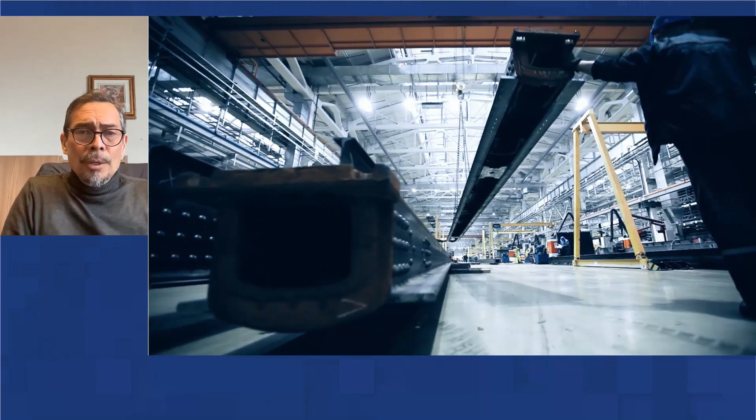Now I'm putting up some images you can see, with insight that we gathered last year. We developed this small video to show our customers and our allies that the demand for the electrification of society is much higher than whatever today's production is of electrical steel, and also of stamped rotors and stators for electrical machines.

What I mean is that today there is not enough capability on the planet to supply the amount of electrical machines demanded by our society.

We are working very closely with steel mills, trying to orient and define what are the best business cases, how to invest, and how to create this capability. We are also working very closely with customers, the OEMs that are producing these electric motors.

Not only in the car sector, also industrial sector and house appliances. But today we're going to focus on the electrical vehicle.

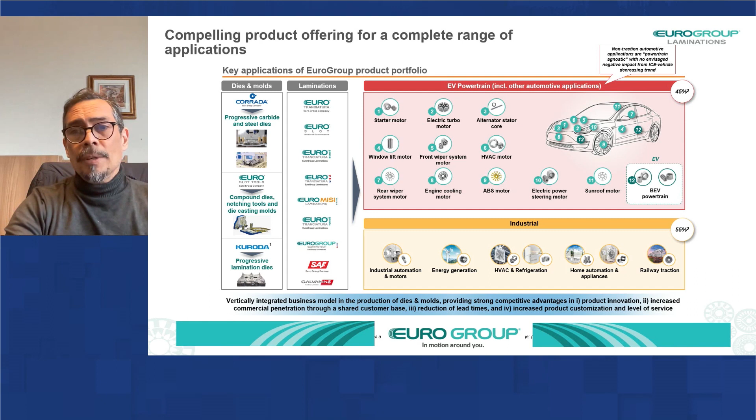We are placed everywhere. We started the electrical vehicle venture especially in Mexico because of a special company in California that I'm not allowed to mention by contract, but for whom we build all their motors globally. So this global footprint is very important for American, European, and some Asian customers today that we have.

We supply more than 60% of the traction motors in North America, more than 50% of traction motors in Europe. In Asia, things are much more complicated. We have a Chinese facility, but you know that the market over there is especially structured in such a way that we are positioning ourselves slowly, but in a positive manner, rapidly I would say. That is going to grow rapidly from now on.

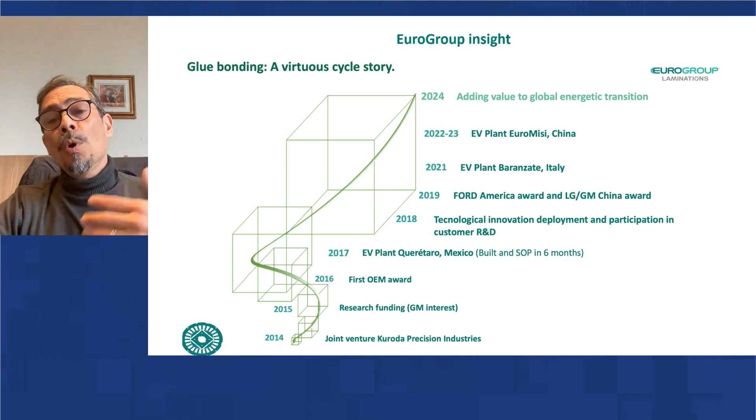In 2016, we launched the first products for this American company I mentioned before, and then in 2019, we started working with most of our customers, Ford, General Motors, Volkswagen, all our major customers we have today. Today we're continuing opening new applications in the EV sector with new customers and tier ones who work with some other OEMs.

So I would like to focus now on the most technical side and leave the commercial side behind. So we have published short communications in 2020 and 2022 that I would like to share with you.

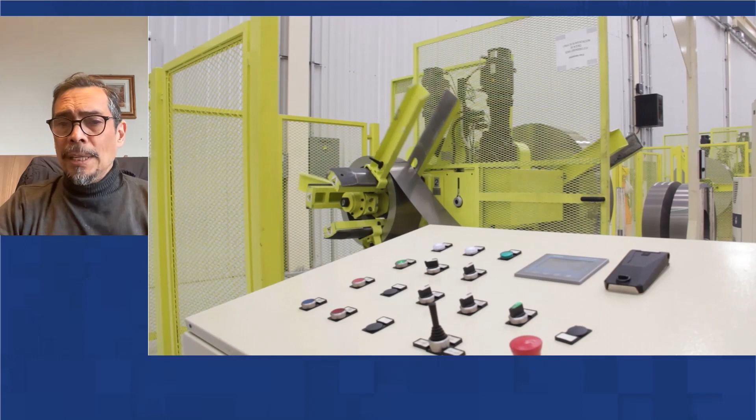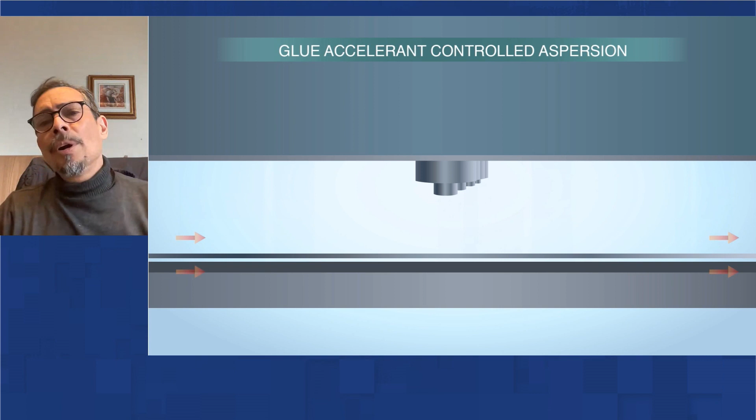So I'm going to show another video here where you see a very different plant that has to be very clean, because now we're speaking about glue bonding inside of the press. In the same stage where you cut the laminations to produce the stator and the rotor, we are capable of glue bonding those laminations together by adding an accelerant on top of the lamination that will come into contact later with some glue dots that we will apply below the lamination.

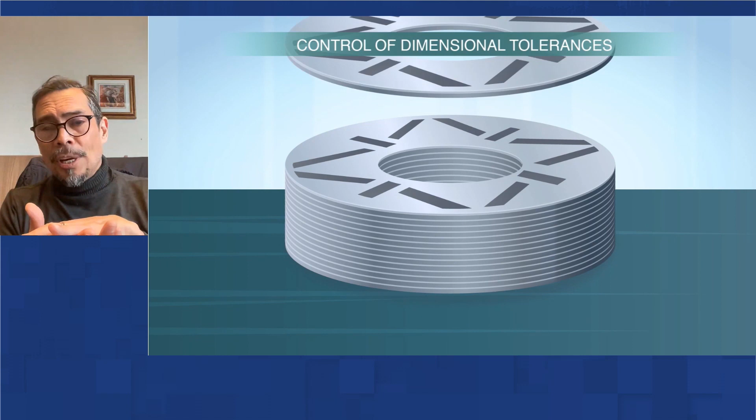So now the lamination has glue dots strategically placed where you want to have adhesive strength, and they come into contact in the last cutting stage, and then because it is an anaerobic process, the curing will start.

That is a very fast curing. As I said, below 2 minutes, you reach sufficient adhesive strength for the part to be taken by a robot and sent into the inspection line and packaging station.

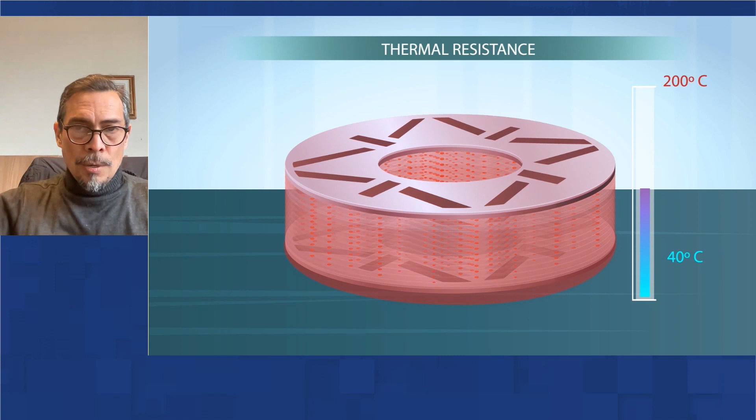We've studied this product with our customers, OEMs and tier ones, and we have demonstrated these benefits that you see, and that I'm going to show a little bit further in the following slides.

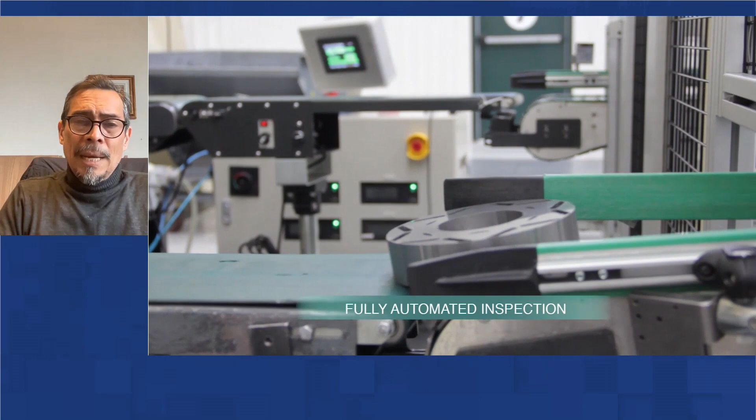But this product is obviously the most efficient magnetically and mechanically. You can see the products coming out. These are real products. After 2 minutes in the press, they're ready to be shipped. The robots are going to take them and send them into inspection.

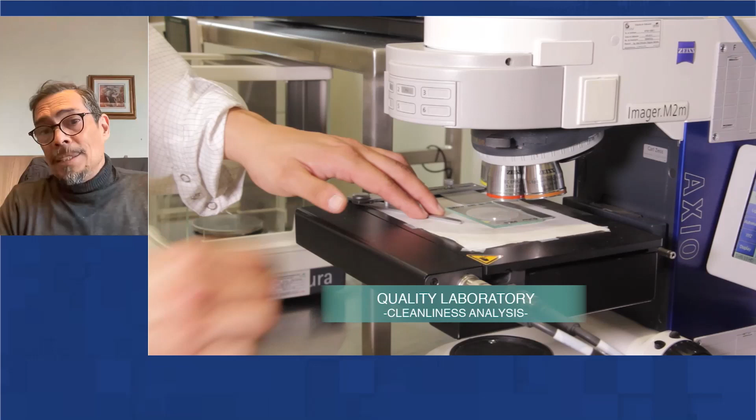We also have laboratories that are going to perform a batch quality inspection that is required by our customers. All the information is gathered into the cloud. So our facility is Industry 4.0, and our customers can follow our production even through cameras, and they can look at their production in line.

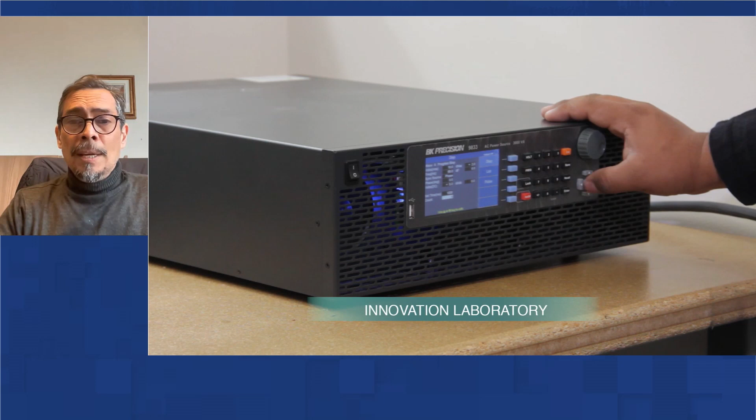We have laboratories that we have set up in Mexico and in Italy with these special test benches that we have developed that are capable of measuring some very tiny differences that sometimes are not sensed by commercial test benches, although we also use commercial test benches in addition to these.

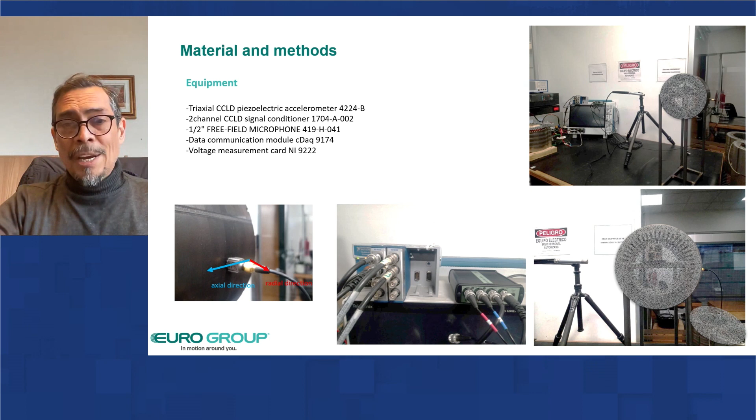These are the test benches that we have set up, complementary to the electromagnetic test benches we have, that can measure noise, both in a free setup or measure noise directly within the electromagnetic experiment.

And you can see from those publications, in red, the conventional fastening methods, and in blue on the right side, how glue bonding benefits by decreasing the amount of losses.

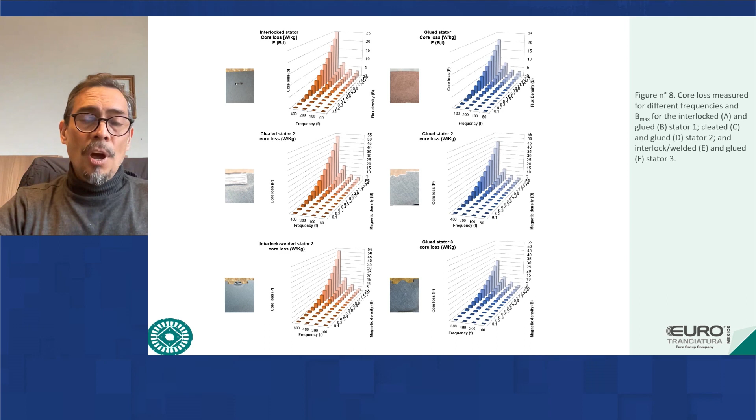These losses come basically from the damage made by these conventional methods on the special alloys that are produced by our steel mills. And this is very important to understand, because the steel mills invest a great amount of carbon footprint in producing a very sophisticated alloy.

Our message is: try not to damage that special lamination, because we have invested so much carbon footprint in it. So let's avoid breaking it, making holes in it, welding it, let's say, overheating it. As you can see...

The metallographic images show that these materials break like glass, and once they're broken, their magnetic efficiency is very much diminished. So that is the rationale behind it.

But when you continue studying the effect of glue bonding, you can show that the mechanical stiffness under compression, as we replicate the shrink-fitting effect inside the motor housing, is much better with glue bonding. And the energy losses, even under compression, were shown to be much better when using a glue bonded product.

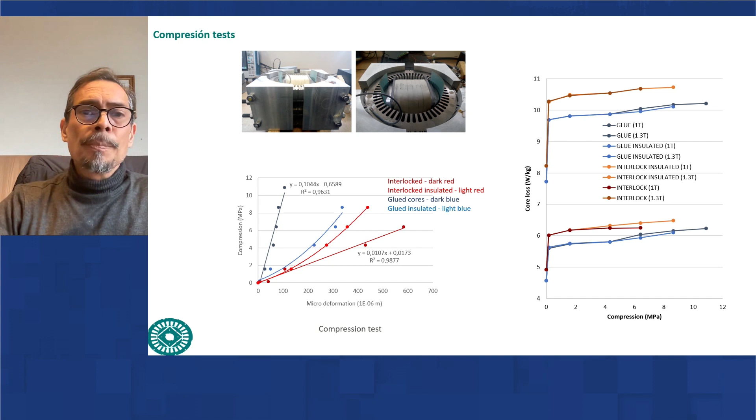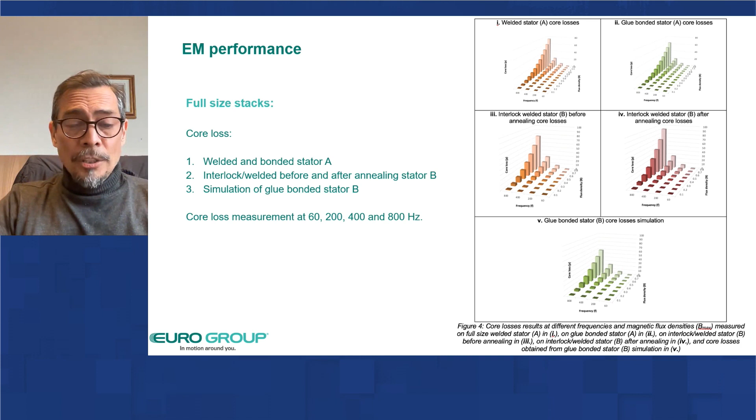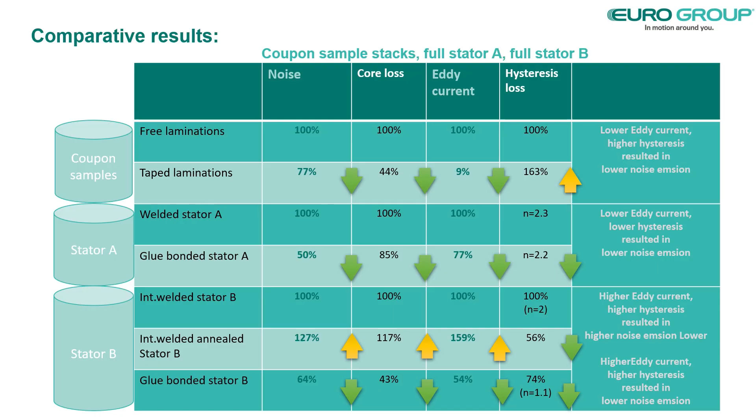We are capable of relating this vibroacoustic behavior with the welding, and also with the annealing that will damage the lamination and the special alloys I mentioned before. So what we're saying in these articles is it is beneficial to go with glue bonding, and we presented a rationale where glue bonding allowed us to reduce eddy currents, which were shown to produce the vibration I mentioned before.

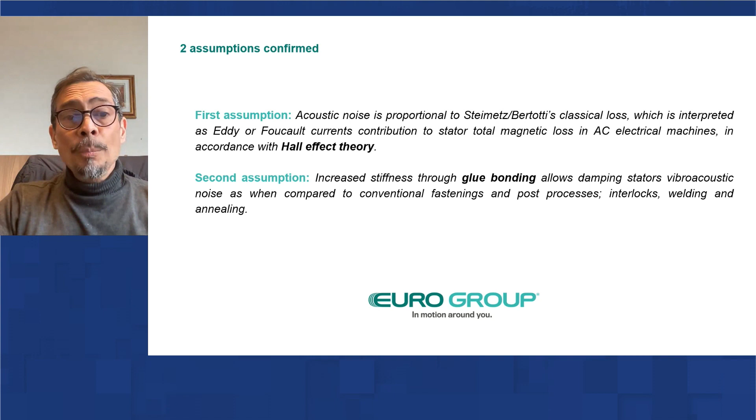But because I see that I only have a couple of minutes remaining, I'm going to jump to the last study that I wanted to show you. This is a study that shows on top the BH curve.

The BH curve is the magnetization curve. So for a given amount of current, you have a magnetic density that is called magnetization, measured in Tesla. On the left side in red, the magnetization curve is very soft, very slow; the slope is small. In green, you have a much bigger slope, and you can see that with less current, you produce a higher magnetization, meaning that with less current, you produce more torque in your car.

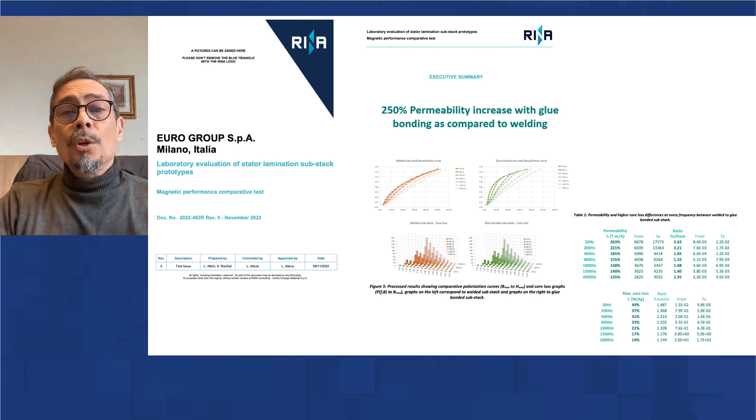And that is very important, because current is heat, current is also vibration, current is management of your battery, and current is management in your inverter. With the University of Padova, we analyzed further, in a driving cycle, the behavior of using less current in your machine, and what it would represent in terms of the losses, in this case on the overall machine, including the battery management and the inverter.

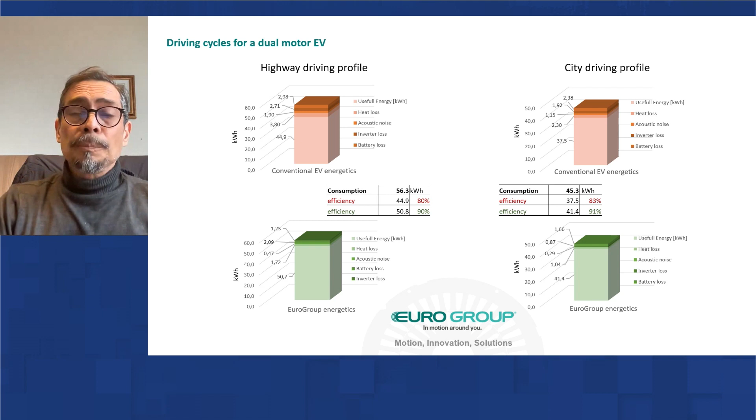And now we're speaking about an improvement of 10% of the energetics of your car. Not only on the motor, I'm speaking about the overall machine, and this is reflected in a range improvement of more than 10%, meaning that for the same battery charge, you're going to drive more than 10% longer with it. And that is very impressive.

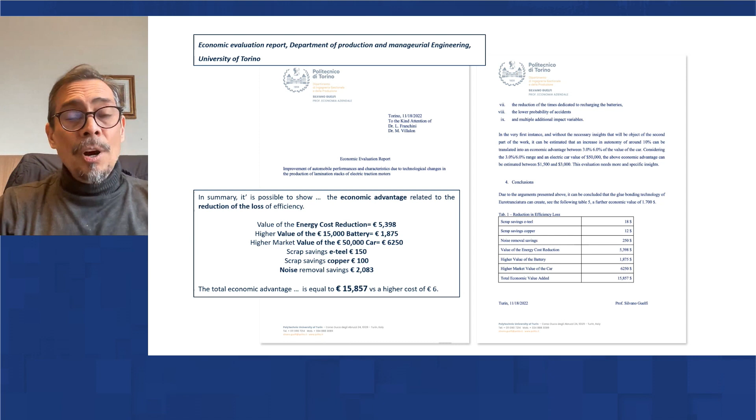This is the report by the University of Padova. The University of Torino helped us to make sense of these numbers, and they show that it represented a value of 15,000 euros in benefits for a longer life of the car, battery and inverter system at the customer level.

So now I have my little chrono here. It looks like I've been speaking for 20 minutes, and that was the deal. Dr. Villani, I will give you the microphone back.

Thank you, Dr. Villalon, for your interesting presentation. We have received 2 questions from the audience. The first one is: what is the typical quantity of electrical steel needed for a permanent magnet synchronous motor magnet? I think it depends on the motor size, but what is your comment?

Well, in my experience with our customers, we are speaking of motors going from 150 to 250 kilowatts, and they weigh from 20 to 30 kilograms. So that's the amount of steel you have in there.

Okay, another question from the audience. Do you think that in the future the stator and rotor core can be realized by 3D manufacturing? I love this question because, as a belief, I have that belief, and I am very excited by this. But I have to confess that my boss is not very happy with my belief, and I agree with you. The future is probably, yes, additive manufacturing. Thank you.

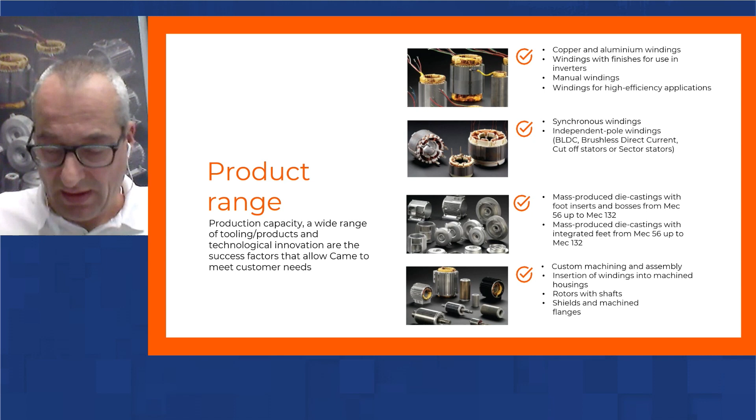A short view of the product range. On top, winded stators - particularly distributed winded stators, which are very common. The second picture is concentrated stators, particularly for brushless motors. Concentrated means coils winding around each tooth. The third picture is a view of the die casting division - we produce parts for electric motors, but not only for electric motors. The picture on the bottom completes the production process: machining of the winded stators with the housing, as well as including the rotor, eventually with the shaft.

As I said, not only aluminum parts for electric motors, but also third-party die casting parts, very different from electric motor parts, such as housings, shields, and flanges. Here you can see a view as an example of some of the most important production of Came, speaking of aluminum die casting.

Not only products - I'm speaking briefly about services too. Myself, as R&D manager, cover different topics such as the design of electrical motors, the testing of electrical motors. One important thing nowadays is the optimization of existing motors - we can see a lot of improvement we can introduce in electric motors, as well as some bench tests of electric motors and partial discharge testing.

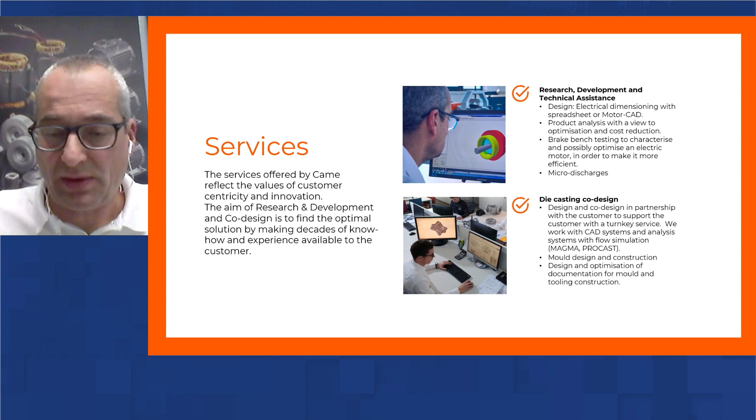Regarding the die casting division, we can follow the customer with the project from the very beginning, and we also have the possibility of making optimization and simulation with Magma, for instance. We follow the project from the very beginning, from the production of the mold and then the wall test.

Just a brief picture of my colleagues.

Before I go into more details, I would like to show you a brief video. I'll ask the organization to start this video, please.

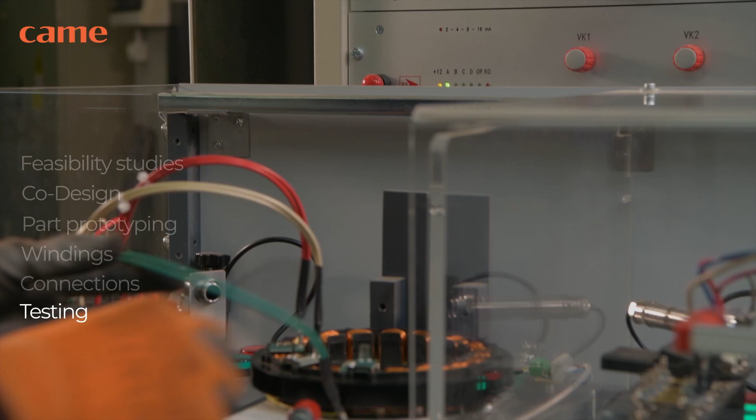There's material cost and material feasibility. Looking at distributed winding, it's for sure a very well-known process - we can find all the needed parts very easily. There are many different suppliers for the same part, for instance Eurotranciatura. On the contrary, for brushless stators, there is so far not yet a commercial part - every product is a customized product. For every product you need a dedicated stamping tool, a dedicated winding tool, and so on.

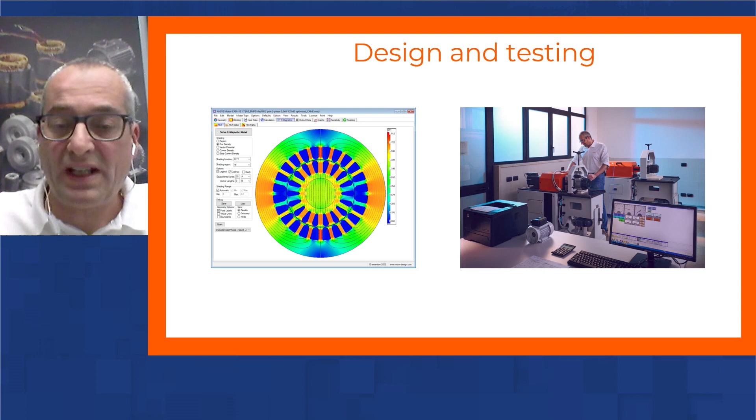Design and testing is also one of the very important key points in these products, meaning that motor CAD designing is nowadays a must. Interesting is that through motor CAD simulation, it is possible to arrive not at one unique defined solution but at different solutions. So we sometimes offer the customer at least two different solutions, stating all the key points as well as the cost level and price at the end. And not only design, but also bench testing to confirm the results of the design.

At the end of the presentation, I would like to spend a few minutes on partial discharges. It is an issue related to inverter duty. Anytime you have an inverter supplying the electrical motor, you will face trouble because of peaks of voltage, which will at least disturb the motor, but in the worst case can really damage the insulation of the winding stator. And the higher the bus voltage, the worse the condition.

We are getting recently some requests from our customers for 800 volt electric motors. And 800 volts means you will face strong troubles regarding partial discharge due to these voltage peaks related to the inverter function itself. They cannot be avoided, but it is possible to work on that and find the best solution in terms of partial discharge to ensure and grant the life of the electrical motor during its function.

Now the final question: if I go back to the picture of these two stators, who is the winner between these two different solutions? I didn't speak about other solutions on the market, like the hairpin or the flat copper wire, only these two because they are property of KAME's processes and knowledge. Who is the winner is not an easy question, and the answer is not easy either. If I look at the most important automotive players, I cannot see so far a unique choice. We see both choices, also different choices, matching with rotor with magnets or reluctance rotors and so on. So a unique solution hasn't yet been defined.

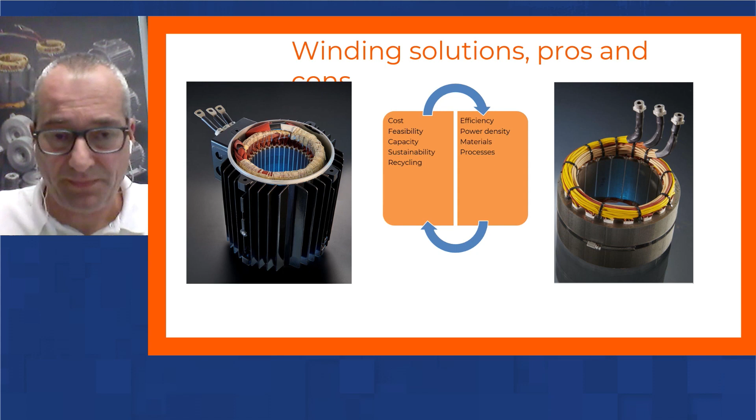How much is the maximum slot fill factor for the distributed winding in your product?

Good question. It depends on the size, because if we go to the smaller stator we produce, the IC50, speaking of dimension we're talking about a 73 outside OD, 38 ID stator, we are around 32-33%, looking at an industrialization feasibility. The filling factor considers the total cross-section of the stator slot and the cross-section of the bare copper wire, not including insulation. So on the smallest one, we're around 32-33%. But if I go to bigger stators, the IC160 and 180, particularly for low voltage stators produced with many parallel copper wires, we go up to 48%, which is extremely high, but grants a very high quality result.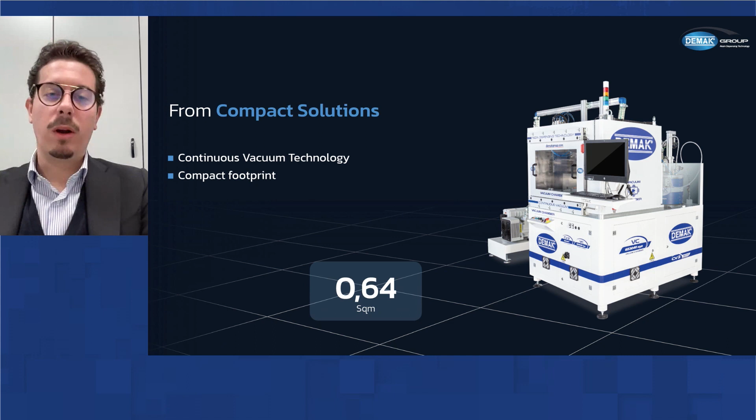A fully automatic line is a solution where Demak takes care, at 360 degrees, of the potting process for stators or rotors. Starting from preheating of the parts—of course preheating also depends on the temperatures involved in the process and the temperature of the resin to be dispensed—after preheating of the stators comes vacuum potting, then resin polymerization through tunnel ovens, arriving at the final stage of cooling down.

This kind of automatic line usually works with only one operator, whose duty is just to load and unload the parts from pallets. In case you want to automate this step too, the machine can work autonomously without any operator.

Also, some words regarding our resin manufacturing facility: here the process of production is fully automatic. The company today is in expansion, so Demak will invest very soon in a new plant in order to increase production capacity, which already today can count on 50 tons per day, working 3 shifts. Thanks to the full automation of our cycle, it's also possible to guarantee complete lot traceability, so we always know from A to Z what happens to each resin and hardener batch.

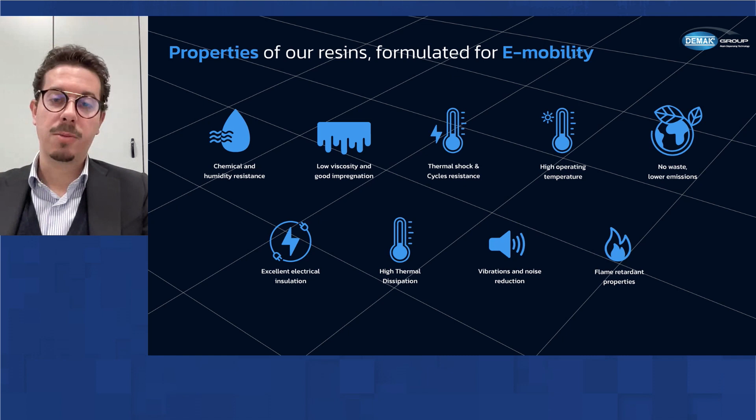Let me say that many of these characteristics always pay attention to our mechanical background, because we perfectly understand how tricky it can be to handle abrasive materials in production, or the impregnation grade through low viscosity. So many of these characteristics also come from our mechanical experience of the dispensing technology.

The company is ISO 9001 certified, and we are also going through the IATF certification that will be operative and certificated from January 2024. This is made to serve better our tier 1 and OEM customers. We cooperate a lot with external laboratories, with University of Torino, Milan, for all the tests we are not able to conduct internally, with others that have the instruments adapted for the scope.

Going a little bit more into the specific topic, Demak is not only a resin system manufacturer, not only a dispensing equipment producer, it can really be a partner, a consultant for electric motor customers and people who would like to perform potting technologies into their models. So we have three kinds of approach with our customers.

One is process consulting, where we go to determine the best potting cycle with all the times for productivity and impregnation of the stator. We can also make chemical consulting, going to select the best resin system according to the parameters our customer is looking for, along our quite broad portfolio of resins.

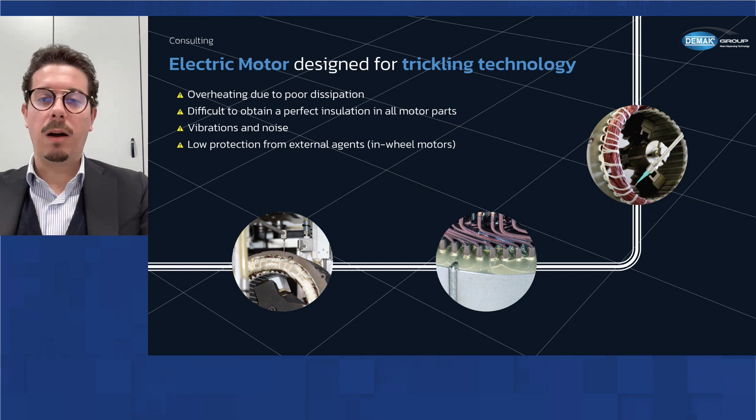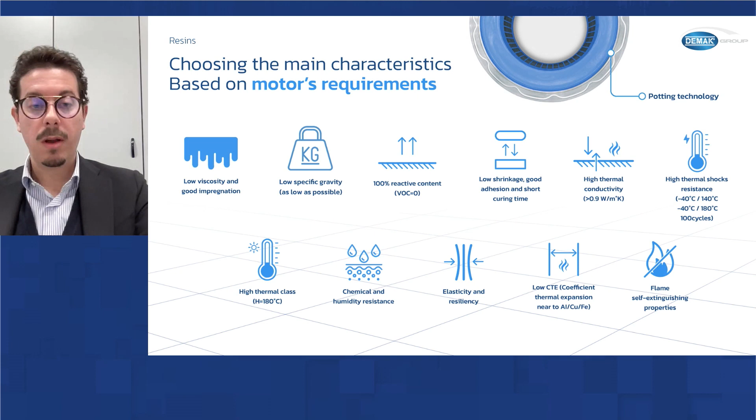And that's why Demak is proposing potting technology. To go deeper into the resin selection, I will leave the floor to my colleague, Dr. Menozzi, who will explain better the characteristics of the resin system we are going to propose and the process related to the selection. Thank you, Dr. Menozzi. Thank you. I am Alberto Menozzi, plant manager of the chemical plant of the group.

Our R&D is very strong in this field, and we have developed several formulations, epoxy and polyurethane, room temperature and heat curing, in order to meet all possible customer requests and possibly also to anticipate some customer requests.

A main characteristic of the system that we look for is the low viscosity and good impregnation. This is very important because it's necessary to fill completely the space, avoiding leaving air inside. Air has practically no heat conductivity, it's 0.03 watt meter Kelvin, so nothing. It's very important to avoid air and to have, by the resin, a very good heat dissipation.

Reducing the space of the motor means increasing the power density, which means increasing the development of heating. So it's important how we can dissipate this heat in the best way.

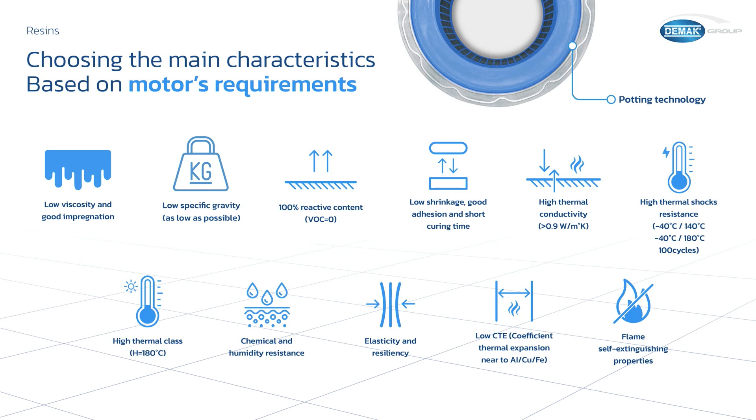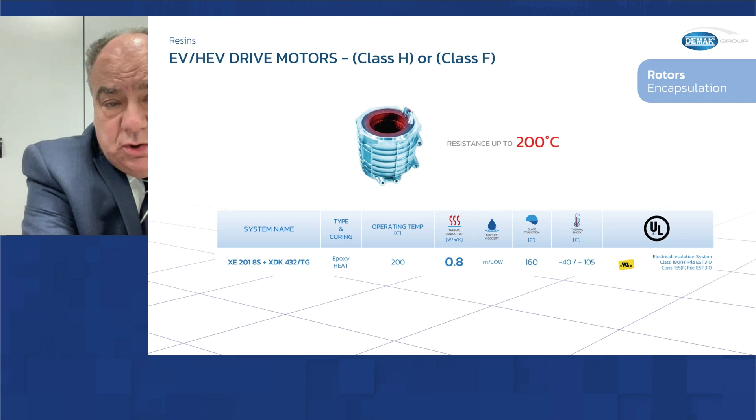In this slide we show one system that is suggested for rotors. In this case, the main important point is the glass transition temperature, which must be very high, because rotors can reach high temperature, and it's necessary to have a resin that mechanically maintains its characteristics also at high temperature. Please note that all these systems are UL certified.

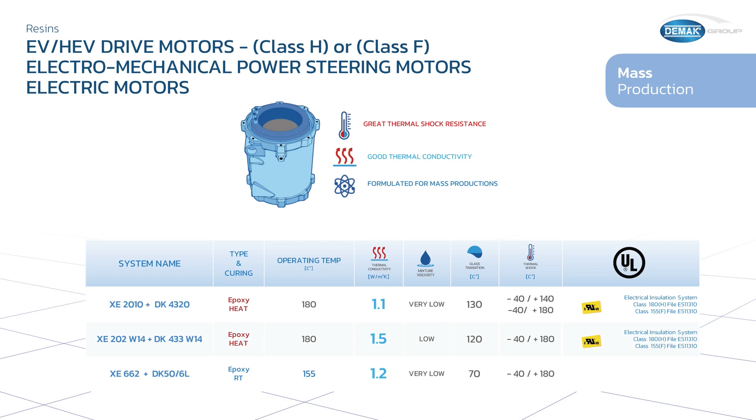These three systems are more used for mass production. Mass production means a lot of motors to produce, so they are easier to work with. Two of them are heat curable, so they need an oven for curing. The third one is a room temperature curing system that, however, shows very high thermal shock resistance and very good 1.2 thermal dissipation. So it's used a lot by customers for mass production.

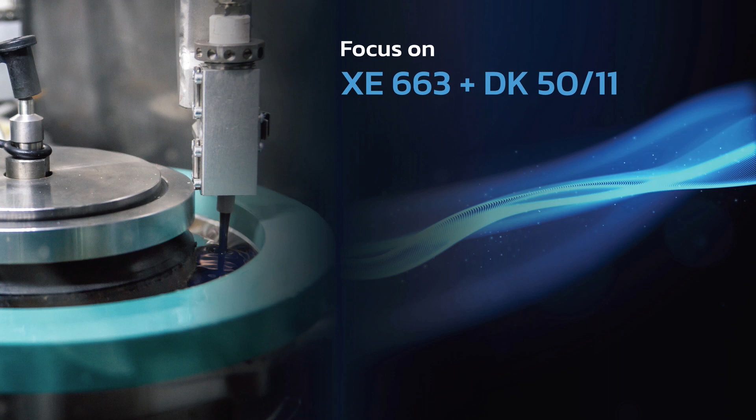As I said, we focus now on a particular system named XE663 and DK50-11. This is a system that shows a lot of good features. First of all, the low viscosity, very important for application and wetting of the motor windings. High thermal dissipation, high operating temperature, very high thermal shock resistance - incredibly how many cycles it resists - resistant to chemicals, for example ATF oil, excellent electrical insulation, and very easy to use without the need of high temperature for curing.

Here you see the weight loss after 5,000 hours at 200 degrees. This is reduced loss of weight, maintaining practically the same starting mechanical and electrical properties.

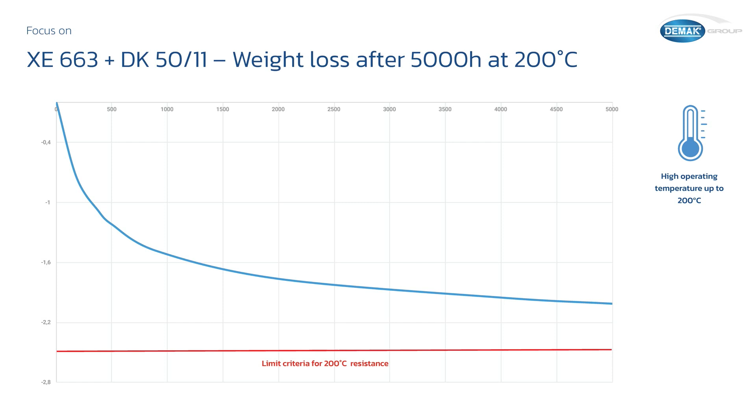The results are incredible. Not only do we arrive at 100 cycles, the minimum that we ask for the system, but we arrive at 1,000 cycles without any crack, and we stop at 1,000 because we need to use our chamber for other tests.

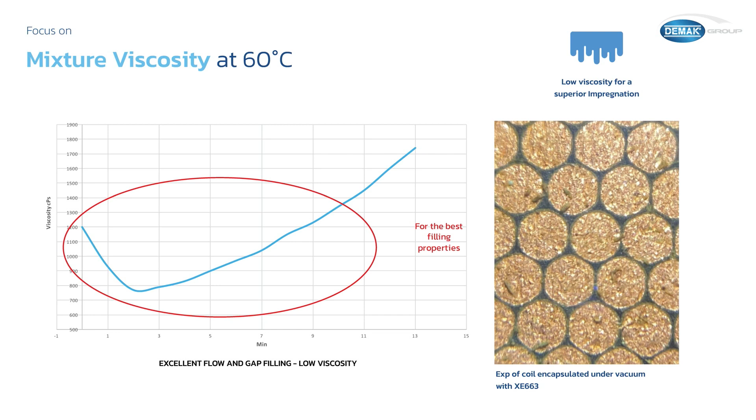Another interesting system, used also for motors, also at room temperature curing, is the XE661 and the K5006. In this case the TG is lower, we speak about 65, 70 degrees. But tests performed on motors show that operating temperature is reduced between 25 to 40% according to the motor dimension. It means a lot more life for the motor in working, in exercise.

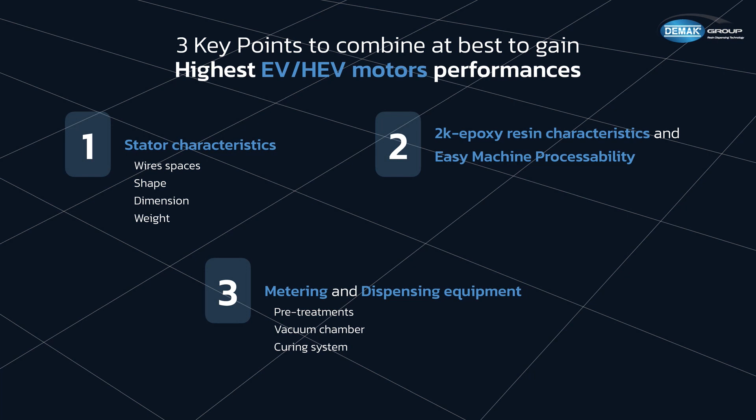Okay, so thank you, Dr. Menozzi, for the precise insight. As you can understand, the main target to achieve a very good impregnation and good heat dissipation cannot only depend on the resin system itself, but is a combination of factors. First of all, the stator characteristic, the spaces available, the shape, the dimension, and the weight that we have to respect. After that, of course, a good selection of the correct epoxy resin system to have good performances that our customer is looking for. But the third, and maybe one of the most important, is also the dispensing solution that has to perform the potting in a certain way in order to achieve the results that are then shown on the technical data sheet.

Thank you, everybody, for your attention.

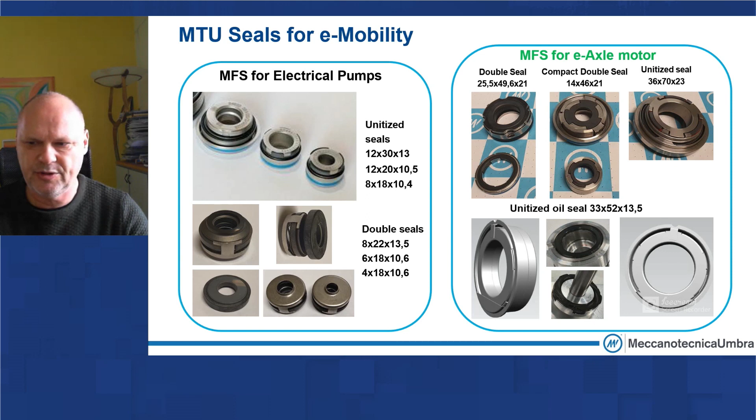In particular, we will focus this presentation on the product for cooling the motor, and the product we are considering is layout B. So after developing 3 different layouts, we saw that the best solution is layout B, for reasons I will explain later.

The cooling of the shaft of the electrical motor is something like this. The mechanical seal has the role of avoiding leakage between the rotary shaft and the cover of the motor. We have seen, through experience with our test bench that we produce internally, that the best solution in this case is to design a mechanical seal with a very small peripheral speed. This means that the shaft of the motor, where the mechanical seal is placed, must be small.

With this solution, we are able to avoid or reduce much the leakage due to the centrifugal effect, because in this case the fluid is inside the mechanical seal. During rotation at a very high speed, the centrifugal force on the fluid between the sliding face of the mechanical seal increases the leakage rate. So to reduce this effect, it is important to design the shaft in the seal chamber as small as possible.

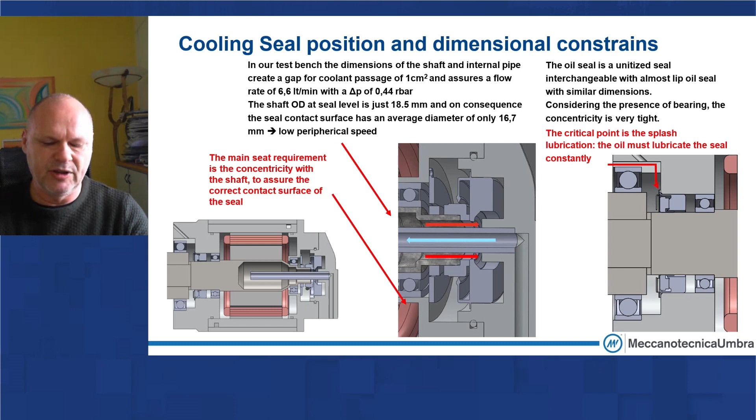About the oil mechanical seal, we have different needs, because we have the oil outside the mechanical face seal. This means that there is no centrifugal effect that increases the leakage. Let me jump to the next one.

So the solution that we developed for cooling the rotor shaft is this kind of layout. As I told you before, we required a very small shaft, but we obtain in this case also a very small axial length.

The main characteristic of this mechanical seal is that we found a system for assembling the seal and avoiding this type of error, the tilting effect. When a rotary part of the mechanical seal is assembled on the shaft, a mistake between the rotation axis of the shaft and the rotation axis of the rotary part could form an angle. This angle produces a tilting effect, and this tilting effect increases the leakage. We developed a solution in this product to avoid that this mistake during assembling affects the leakage rate.

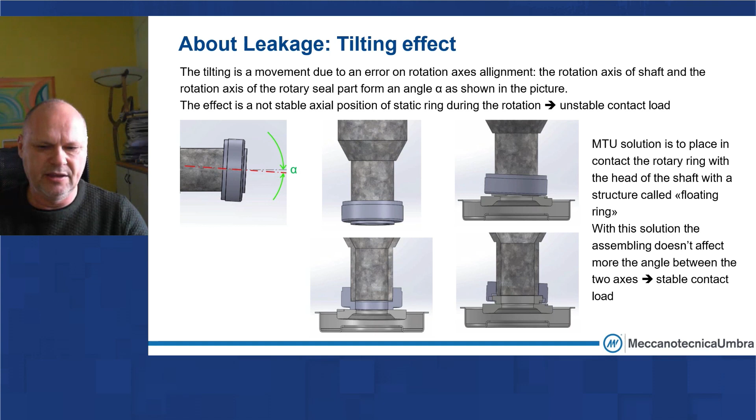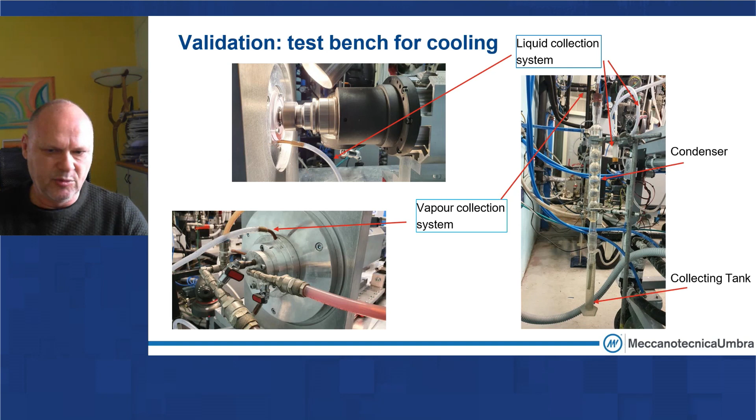We are also able to reproduce the axial movement of the shaft of the motor, and we are able to verify and measure the power consumption due to the mechanical seal. This is another important aspect, because the sealing system represents a power consumption for the system of the motor.

As you know, all power inside the battery must be devoted to the movement of the car. So we have to avoid losing this power with other systems, like, for example, the sealing system.

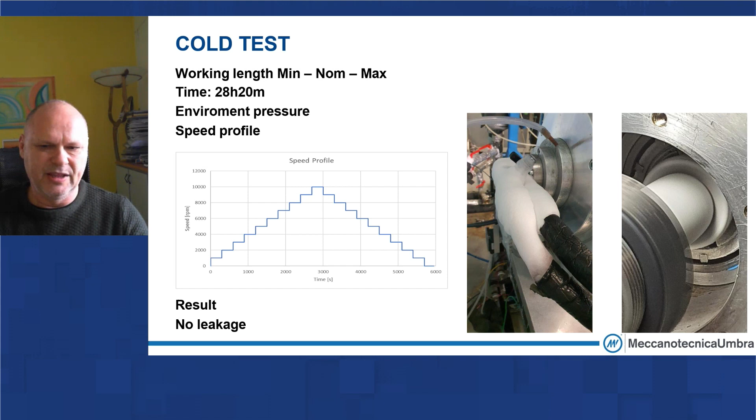So if the temperature increases, the power consumption is reduced. If the pressure increases, the power consumption is increased also. The typical range of power consumption that we have in the tests we carried out is something between 120 watt to 250 watt. It's not small, but we will see how it's possible to reduce this amount of power consumption.

About the performance in the endurance test, the main goal was to understand the leakage rate of this sealing system. We reproduce the working condition in terms of speed, and we define a speed profile in terms of axial movement of the shaft, and also in terms of the pressure of the system.

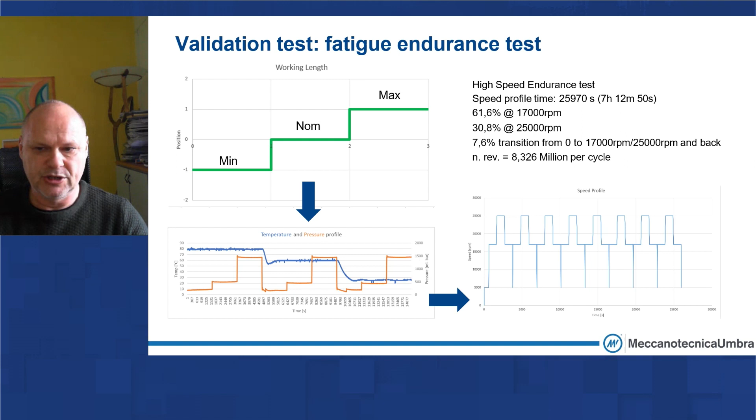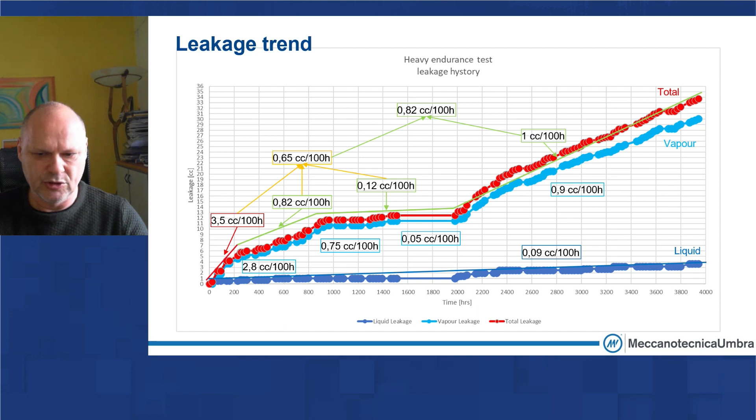We also try to find a solution to reduce the power consumption of this sealing system. One solution for obtaining this result is to design a particular geometry on the face of the mechanical seal.

In this case, we apply a pattern of dots, and by working on the density of these dots, we define an optimum percentage where the power consumption is in a range of 65 to 168 watts.

Of course, this is not for free, because with this reduction of power consumption, the leakage rate increased. These are the curves, but we can summarize.

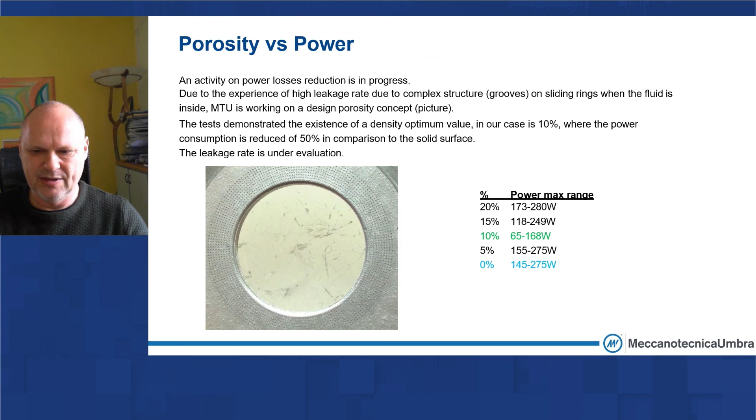We can summarize the result in this picture. So in 1,100 hours, 4 times lower than the other test, we have an amount of leakage very similar to the other test. This means we have around 4 times the leakage with this kind of solution.

What does this mean in terms of managing leakage? If we place the leakage we obtain in a plastic glass, we can see that a full plastic glass is more or less 190 cc.

The leakage we obtained in 4,000 hours with the first solution is something like this. So we have 33 cc in 1 million kilometers.

This amount of leakage, which is the sum of liquid leakage and condensed vapor, must be managed inside the electrical motor. It's not a big quantity, but it must be considered during the design of the sealing area of the electrical motor.

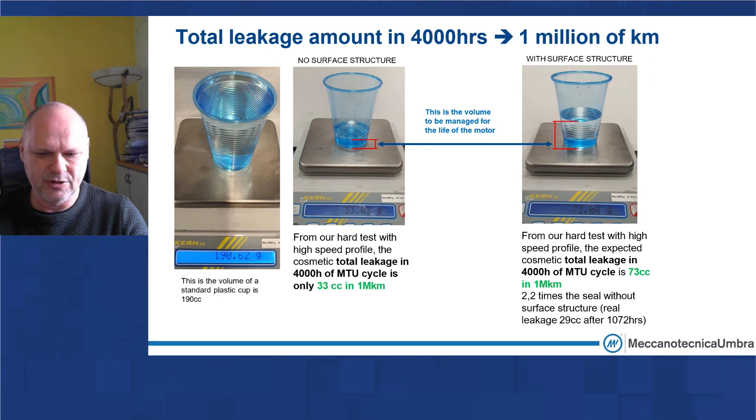So now we pass to the oil seal. Between the transmission and the electrical motor, there could be a need to separate these two rooms. We design an oil seal, a mechanical face seal, and try to have similar dimensions to an oil lip seal.

We obtain this result, and the difference with the cooling mechanical face seal is that, thanks to the fact that the oil is outside the mechanical seal and not inside, we were able to use a technology used for example in helicopter transmissions. This kind of solution allows us to reduce the friction to zero at high speed.

This is an example of a mechanical seal for a helicopter transmission, and this is the graph showing the friction of the mechanical seal as the speed increases.

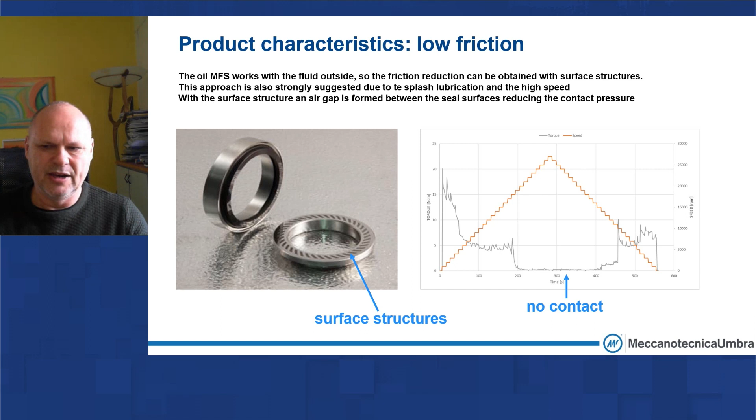This type of geometry is called grooves, and it has the role of separating the faces and avoiding any contact between them. By avoiding contact, we reduce the friction close to zero.

We apply this technology to an oil seal for electrical motors. We also tested this solution in our test benches, where we are able to measure the torque using a floating chamber.

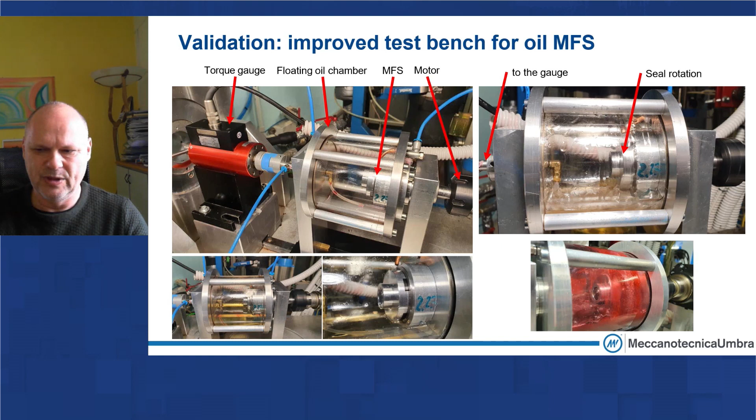In this case, we perform the measurement in dynamic condition instead of static condition, over about 20 minutes. We simulate in this test bench 3 different lubrication types: full lubrication, splash lubrication, and fog lubrication.

This is an important difference, because what we obtained in the 3 different lubrication situations is different. We have the same behavior as the helicopter transmission mechanical seal.

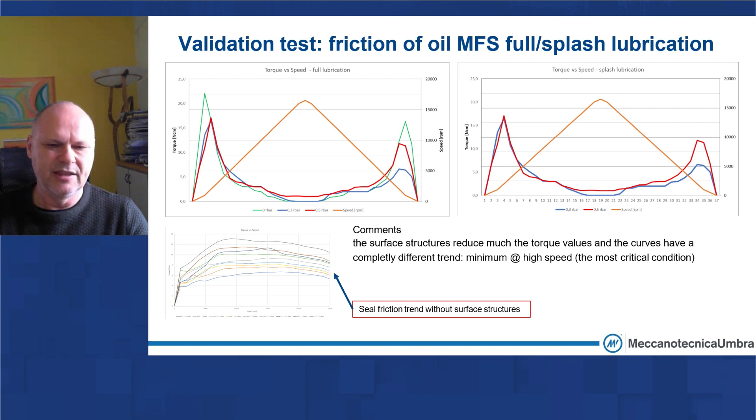So at high speed, the friction is very, very low. The difference is that if we increase the pressure in full lubrication and splash lubrication, the capability of the mechanical seal to fly is not so evident.

But if we work in a fog lubrication condition, we are able to reproduce exactly the same condition as the helicopter seal, so at high speed we have friction close to zero.

In addition, we can see that the power consumption in splash and full lubrication is around 40 watts at every speed. In fog lubrication we don't exceed 20 watts, and as speed increases, this power consumption decreases much further, close to zero when we stay over 20,000 RPM.

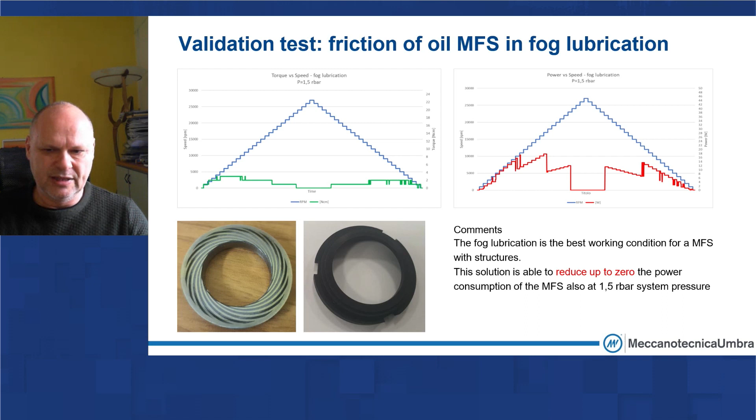So at the end, we can say that in cases where there is a need to cool the rotor, the mechanical face seal solution is a good solution, especially for the lifetime.

In the case of an oil mechanical face seal, the use of fog lubrication is useful for achieving very low power consumption for the system.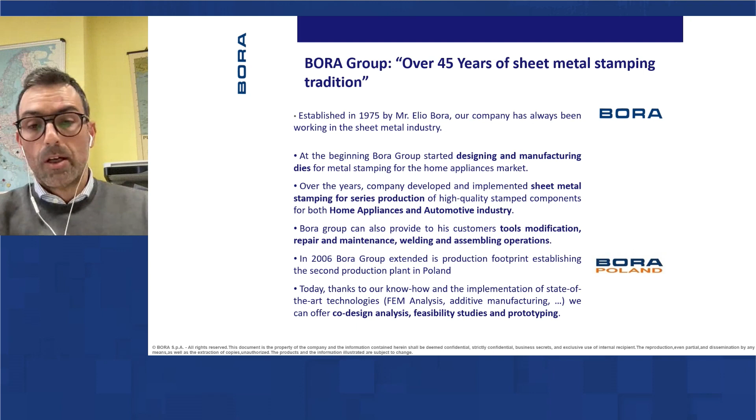In 2006, we extended our production footprint and established a plant in Poland. Today, with our know-how and implementation of new technology, we can also offer our customers co-design analysis, feasibility studies, and prototyping. As I mentioned, we have two production plants, one in Italy and one in Poland.

We are certified ISO 9001, IATF 16949, ISO 14000, ISO 45000, and we recently achieved certifications for information security, the TISAX certification, and ISO 27001.

A few numbers about us: our R&D department has computer-aided design, computer-aided manufacturing, and two finite element method analysis workstations. Our tooling facility is based in Italy, and the production plants are in Italy and Poland for stamping. In Italy, we can process materials up to 10 millimeters; in Poland, up to 3-4 millimeters.

We can also perform assembling, welding, and of course tooling maintenance and modification. We have more than 17,000 square meters of covered surface across our plants. To give you an idea of our capacity, in 2022 we processed 20,000 tons of raw material and produced more than 50 million pieces for our customers.

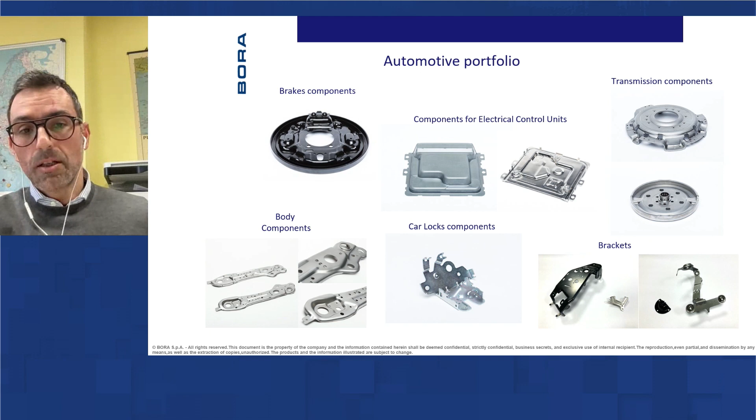Our automotive portfolio is made of different components for different applications. As you can imagine, some of these components will disappear with electrification. Some will remain but will change their characteristics. And some of these components are completely new, dedicated entirely to electric vehicles.

Our R&D department is involved in the development of products together with our customers, because the co-design phase with the customer is very important today. With simulation of the stamping process, we can know in advance, before tooling manufacturing, the final results of the process, for example in terms of material thickness, spring back, or tensile stress.

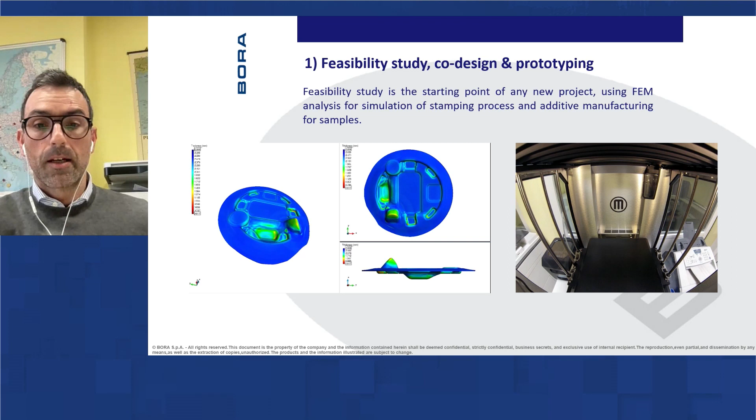Our developing process starts with feasibility studies and simulation of the components. As you can see in the video, the simulation of the stamping process is running, and the colors represent different parameters, for example the final thickness, the spring back, or the tensile stress at the end. We also use additive manufacturing in this first phase to study other characteristics of the final product before having prototypes in sheet metal.

The second phase is tool design and validation. Of course, the tool design is performed with 3D computer-aided design modeling, which is standard. But what's important today, to have a better process and reduce lead time, is to implement this 3D design with new technology.

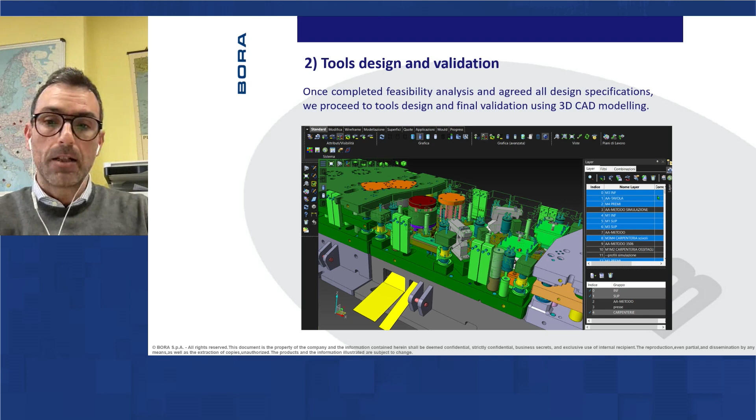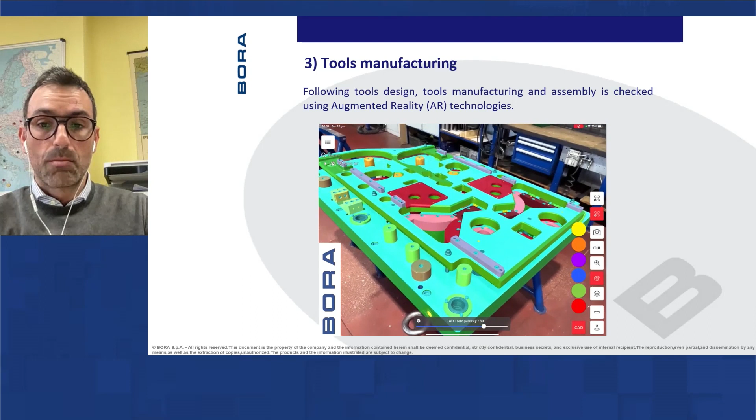For example, after the tool design, during the tooling assembly, we check with technologies like augmented reality that the final assembly is in line with the 3D design. In this case, the operator responsible for the assembly of the tool is able to check by comparing the 3D model with the real tool under assembly, to see if there is any error or something missing in the assembly being performed.

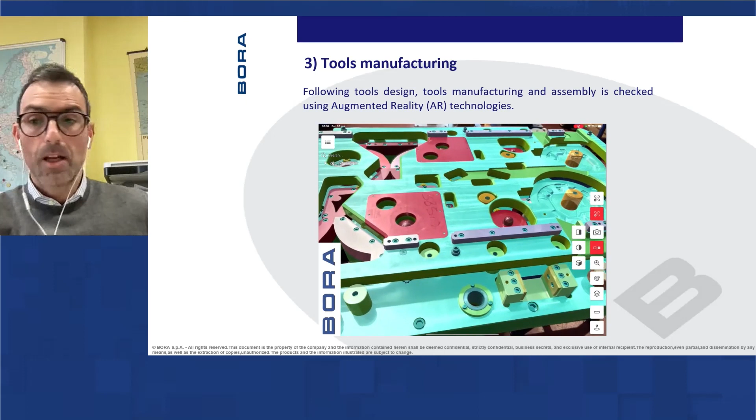The last phase of product development, after the tool assembly, is product validation. This means we need to certify that the product is compliant with the drawing, meaning the dimensional specifications and other requirements. The standard systems used to perform this validation are, for example, 3D measuring CMM machines, or laser and optical scanners to check component geometry.

This brief overview was to let you understand our development process for products and stamped components.

Now I would like to speak with you about the challenges of electrification, because electrification is changing a lot the design of the vehicles and also the components inside the vehicles. These new kinds of vehicles bring new products that were never developed before, new materials to be used in the stamping process, and new requirements in terms of product validation.

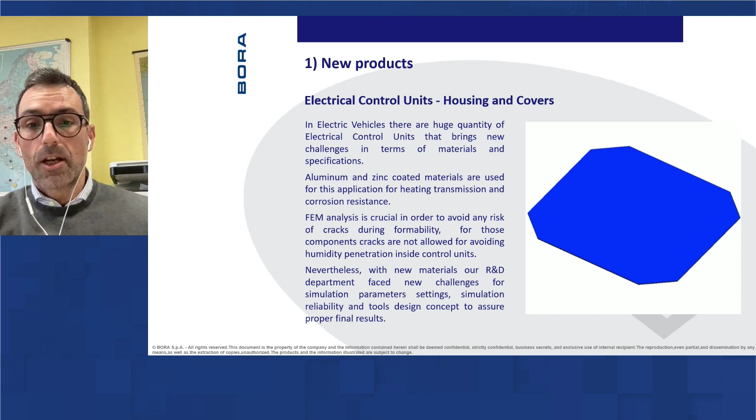When I talk about new products, for example, there are electrical control unit housings and covers, because in electric vehicles there is a huge quantity of electrical control units that for a stamping supplier like us bring new challenges in terms of materials and specifications. For these covers and housings, aluminum and zinc coated materials are used for heat transmission and corrosion resistant capacity. The simulation of the stamping process is critical because we are using new materials.

It means that the stamping and the formability is not like the standard materials that we used in the past for stamping, and also because for these kinds of products cracks are not allowed. We need to assure that there are no cracks to avoid humidity penetration inside the control units.

So for the simulation it's important for our R&D department to set new parameters, because the reliability of the simulation is also based on the parameters that we use in the simulation of the stamping process. The simulation of the stamping process is the first crucial step that we need to run before doing any other step in the development of a new process, and of course before giving our customer the feasibility of the component that is being asked of us.

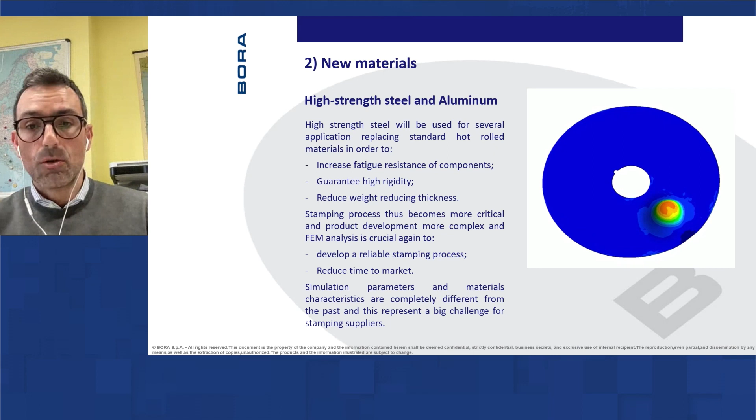A second challenge, as I said, is new materials. New materials are not only related to aluminum, which is very common for new applications, but we are also using high strength steel for new applications.

The high strength steels help to increase the fatigue resistance of the components, guarantee high rigidity, and reduce the weight. The reduction of weight is very important for electric vehicles, so our customers are developing products with high strength steels in order to reduce the final weight of our components and of the vehicles.

If we talk about stamping a material that has high strength, it means that the formability is worse, not so good compared to the other materials we used in the past. It means that the simulation, the FEM analysis, is very crucial to be sure that the stamping process and method we are developing is reliable for serial production of millions of pieces, and also important to reduce time to market.

And also in this case, the simulation parameters are very important to have a reliable simulation and a reliable stamping method before beginning the tooling manufacturing.

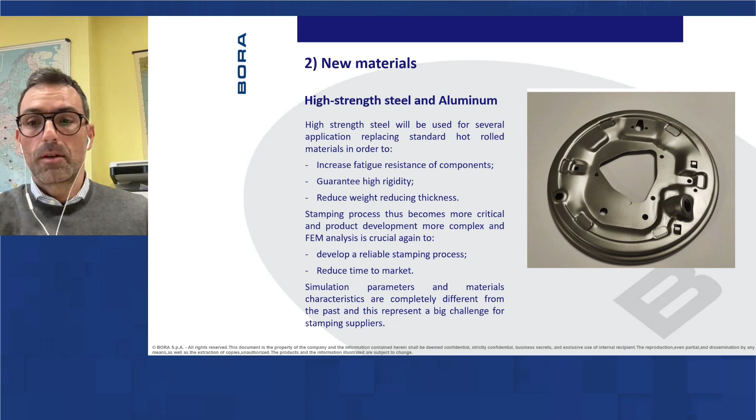Also, the product validation is changing a lot. As I mentioned before, in the past the main validation process was measuring the final part, checking if the dimensions and geometry were in line with the drawing and tolerances. Today, with electronic control units, we have a lot of other specifications that we need to check to validate the process and the product.

For example, for covers and housings, since they need to protect the electric components, there are requirements that are very strict about, for example, the cleanliness for metallic and non-metallic fibers. It means that we need to perform new tests at the end of the production process to validate and check the cleanliness, which was not so important in the past for mechanical components.

Adhesion test is another very important test on the surface, because a clean surface is needed for perfect sealing and isolation. Finally, the leakage test is performed, since cracks are very critical in these components, including not visible cracks. The leakage test is performed with air, meaning even very small, invisible cracks can be critical, so it's needed to check there are no cracks in the stamped parts at the end of the stamping process.